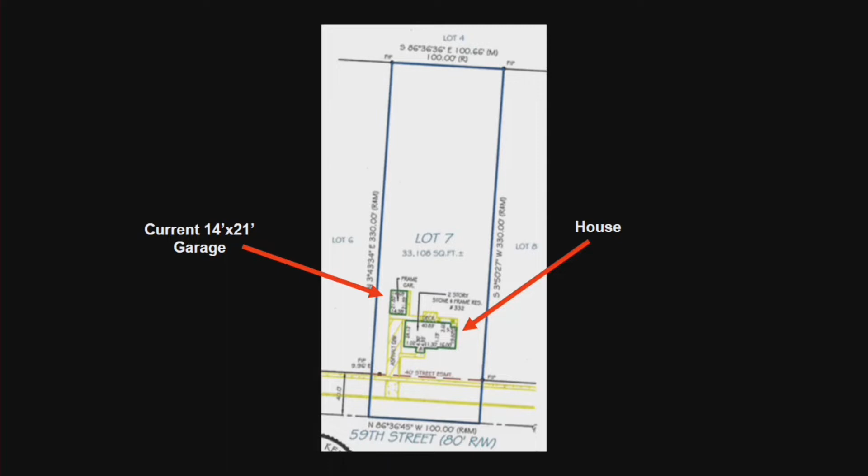Some of the reasons why we think it's important to have this size garage is because we really need the space for the vehicles we have, machines, snow blower, riding lawnmower, and the tools we need to maintain the property. Just because it's such a large yard, we actually do need a lot of different tools and things to be able to maintain it. So that's a big reason why we feel like we need this space.

We've thought about what else we could do if we didn't have this size of garage, and we think we'd be in a difficult situation. We would either need to keep some tools or machines outside of the garage, or we would need to come back and build a separate shed, which, if we had the option, we would rather not do—we'd rather keep everything in one place, in one building.

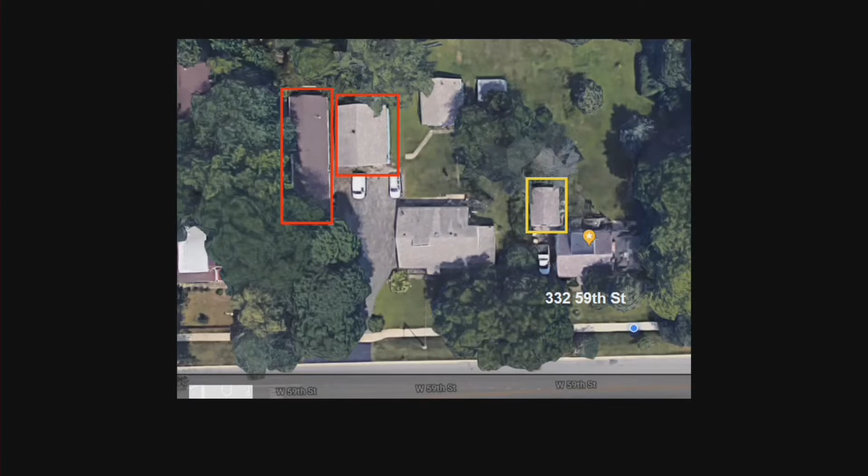A few other points we think are important: we've done the research and made sure this garage would not impact any other structures, any trees, or any of our neighbors. So we know there would be no negatives in that regard.

Also, the neighbors next to us, who would be closest to this garage and most likely most impacted, have verbally approved of what we would like to do. We've talked to them about it and they are perfectly fine with it. I think they'd actually be very happy to not see the current garage anymore, and I think they're looking forward to having it removed.

And the other point is that the existing garage, if we were to replace it with the same size it is now, it would not add any real value to the property by keeping what it is now.

And a last note is that we have no intention of putting this garage in and then up and leaving. We bought this house in Westmont just because we love the area, we grew up here, and we plan to start a family here. We really want this garage to be what we want it to be, our dream garage, so we can stay there long term and not have to move. Yeah, I guess that's all we have, basically.

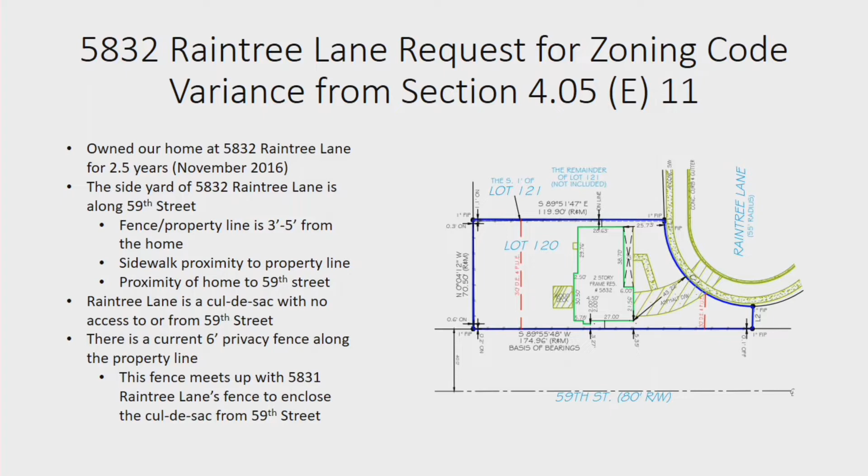It's also important to note that our house is at the end of a cul-de-sac. Our fence being there actually visually encloses our cul-de-sac. It keeps the foot traffic and car traffic visually contained. Our fence is a visual barrier from that. It's also important to note that we currently have a 6-foot fence, and our neighbors also have a 6-foot fence there, which you'll see in further slides.

We feel that putting up a 3-foot or 4-foot fence along the side of our property opens up our property to foot traffic and car traffic. It makes our neighborhood less desirable. It's a cul-de-sac, and it gives that safety and security, whereas with a 3-foot fence or a 4-foot wrought iron fence, you don't get that same feeling. I refer to that as a 4-foot open design fence.

We don't plan on selling our home. This is our home, we have 2 small children, which is also a concern for us with a small fence. But we do feel that in the future, if we ever decide to sell, it could potentially decrease our property value and the desire to purchase our home, as well as our neighbors' homes.

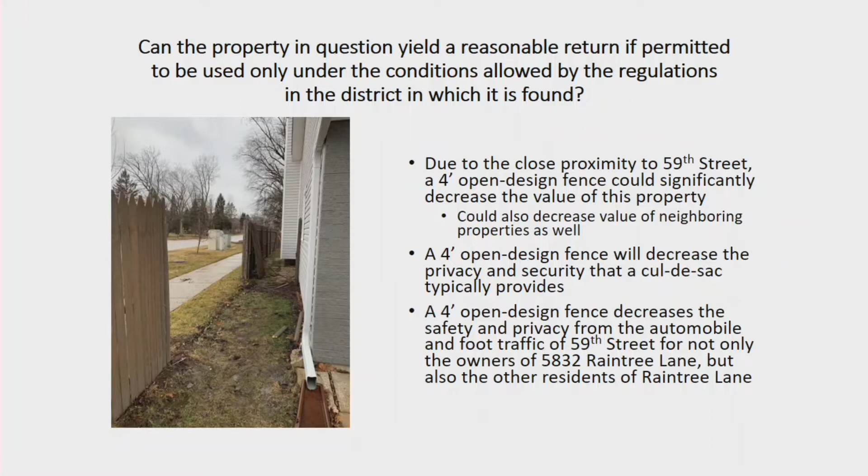I do feel our situation is very unique in that we are a cul-de-sac. There is no car traffic to and from 59th Street. Our street is enclosed that way, so our 6-foot fence would not obstruct any vision lines or sight lines of drivers. As you can see, that's our fence, the brown one to the right, and the lighter brown to the left is our neighbors.

We feel that our 6-foot fence, which is currently grandfathered in, is in desperate need of replacement. It's beyond repair. You will see in the next couple of slides what I'm talking about.

Here are some examples of the damage. That first picture is the back of our property. Our neighbor's branch had fallen, which impacted the stability of the back of the fence, which is why you can see the 2x4 supporting the back of our fence. The third picture shows the condition of the wood - it's rotting. You can see that post is the next one to go, essentially.

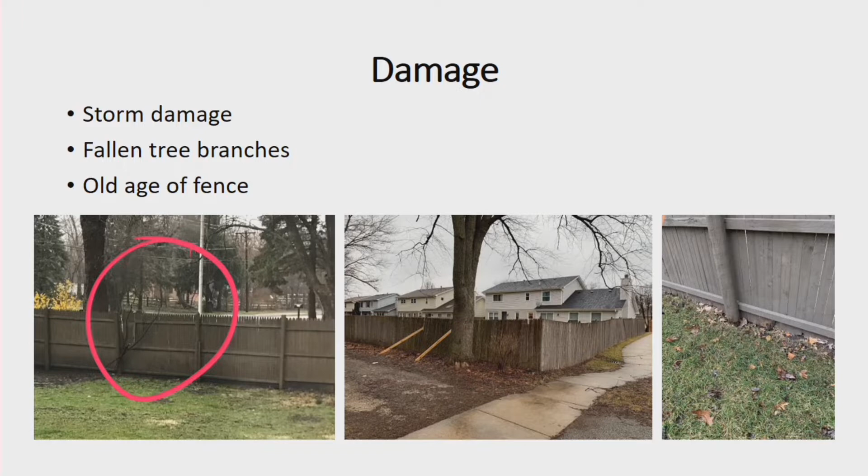We had a winter storm on November 26th, which resulted in a significant amount of ice impacting that section of the fence. We have it anchored so that it does not fall onto the sidewalk, which is about 2 feet from the fence.

This is that same storm, another section of our fence. Another branch from our neighbor's tree had fallen. Again, the March 14th windstorm - we were basically given no option as to what to do. It was beyond repair there.

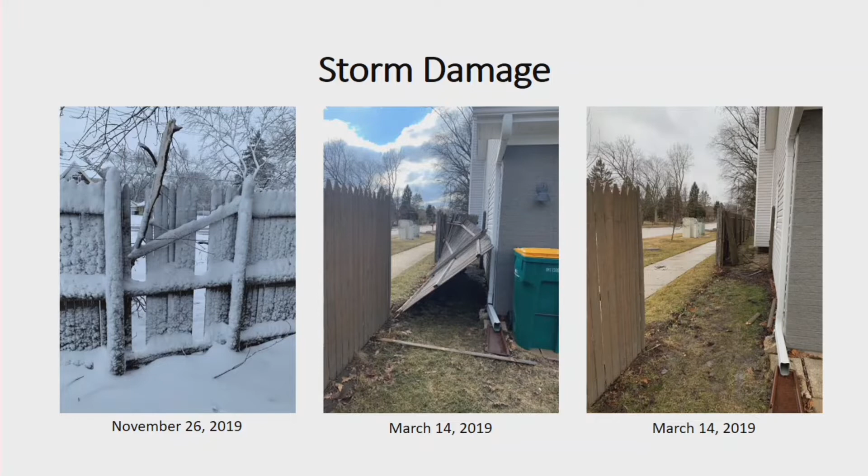These are some benefits we feel, not only for us, but for our neighbors as well. Aesthetically, a 6-foot fence meeting up with a 3 or 4 foot fence may look interesting. It would just allow more people to come into our cul-de-sac, unwanted individuals perhaps. There's the privacy of 2 adjoining 6-foot fences, as well as safety and security. We bought in a cul-de-sac in a subdivision for a reason - you have that sense of security that if someone's coming into the cul-de-sac that you don't want there, one or more of your neighbors is going to see them before they leave. We feel that having a lower fence will not provide that same feeling.

So we are proposing to install a 6-foot dog-eared shadow box fence. This is actually a photograph of our neighbor's fence along the north side of our property line. They have that current fence, and we would like to continue that design throughout. And that is all.

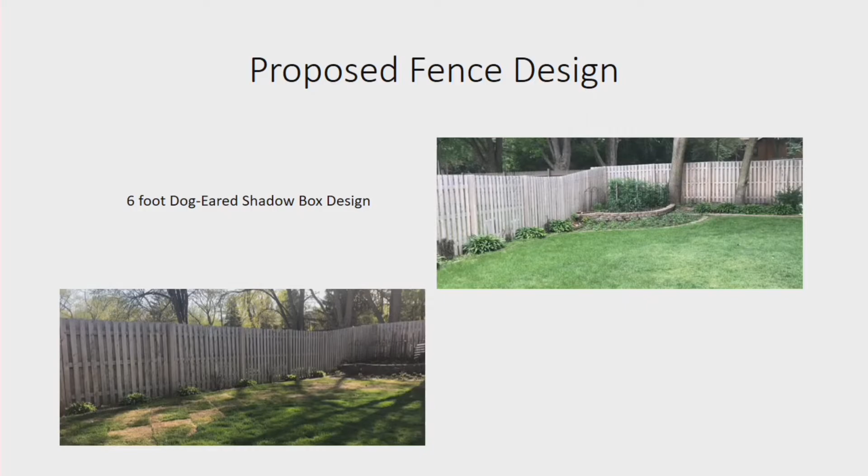Well, the variance request is for a replacement of an existing fence. If they were to tear down this fence, they would not be able to rebuild under the current zoning code regulations. They'd have to build a 3-foot-high wood fence or a 4-foot-high open metal fence. The other alternative would be a 6-foot-high fence behind the rear of their home, set back 15 feet, which would reduce the size of their yard and open up the southern edge of their property to traffic along 59th Street, increased noise, and confine the dog to a smaller area. So staff does concur with this application.

Also, there have been other applications in the past for variances for this type of fence, and they've been granted. We also concur that they would have to continue repairing their fence piecemeal, taking out a board or two or replacing sections, which is untenable and wouldn't add to the aesthetics of the area. So we concur with their application.

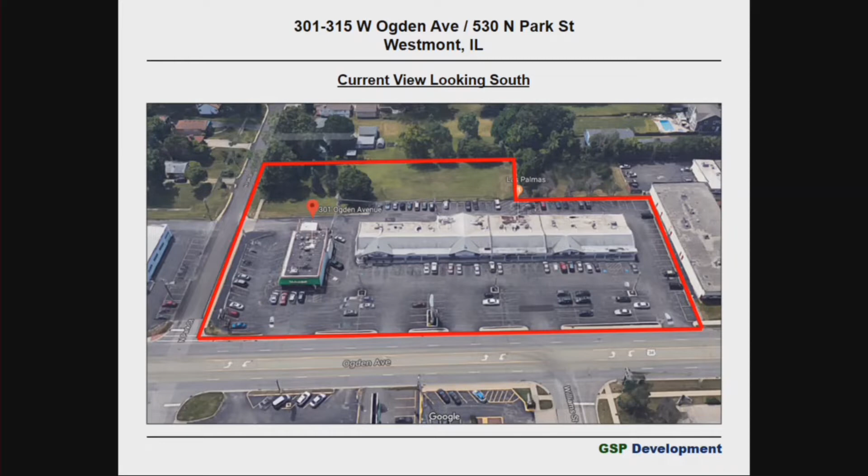As a quick overview, it's an older C-quality shopping center right now. Along Ogden Avenue, there's no landscaping whatsoever, no sidewalk, and there are 5 curb cuts currently. There's no trees, islands, or any landscaping on the entire site, so this would be a significant improvement from what is there now.

The next page shows the current zoning, and you can see my neighbor has been given zoning for what was a residential lot that's now become a commercial lot. We're asking for the same, and that's true as you go up and down Ogden Avenue. I put this in here to show that this is not something that hasn't been granted or given to others along Ogden Avenue.

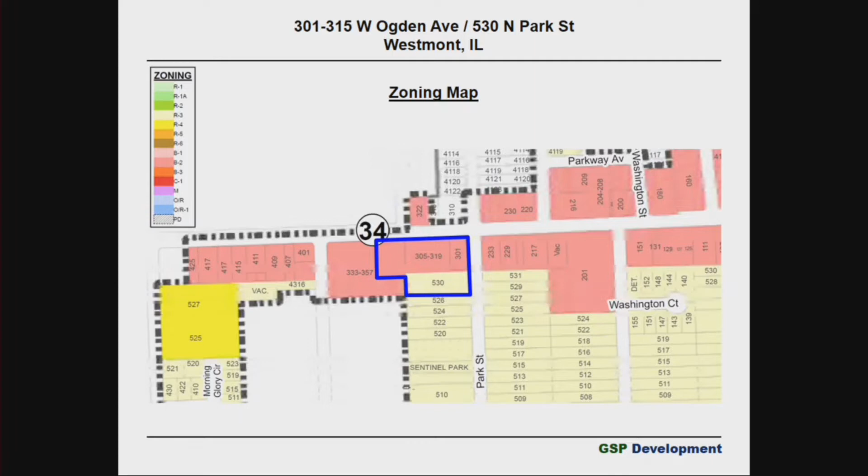The next one is a site plan. It's not a landscape plan, just a site plan showing our single entrance off of Ogden Avenue and an additional one on the east side of our property. All the landscape islands are shown also.

We are asking for some relief on some of the sizes of the parking stalls themselves. As a side note, these parking dimensions would be approved in virtually every other community in the western suburbs right now. Your code is much stricter - not that it's wrong, but it's much stricter than anyone else. This would be okay in Oak Brook or Downers Grove or anywhere else.

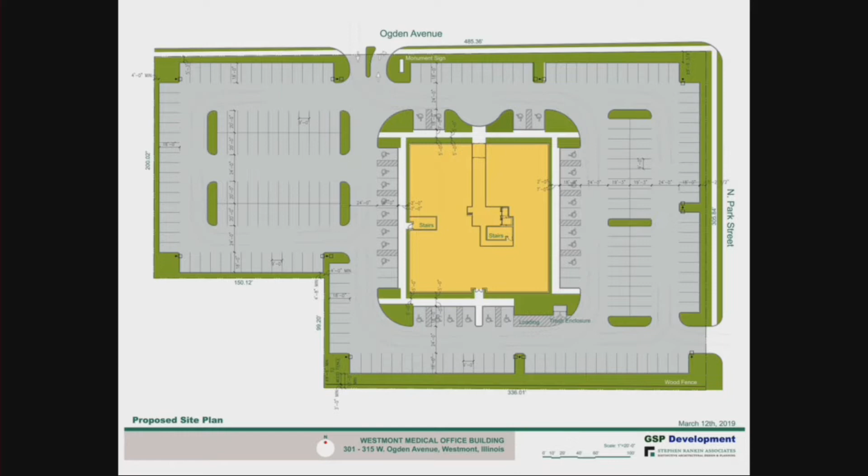So we are asking for some relief on the size of those. You had asked what changes we've made - we've made some changes on our landscape plan, pulling it off of Ogden Avenue a little bit. We'll have a strip of landscaping of grass, a 5-foot sidewalk, and then it'll vary, since it angles kind of funny right there, from 5 to 10 feet of additional landscaping along Ogden Avenue. So significantly more than was there before, a little bit more than we presented before.

In addition, we took some comments from the board members, especially the Chairman - we thank you for your input. We've added landscaping in the corners, and if you can see where the red circles are, we've cut out a couple parking spaces. We were slightly over what we think we needed, so we've cut out a couple parking spaces and put more landscaping on the site, which we think was a great idea and improves it.

We will continue to have, along our south border with our residential neighbor, about a 2-foot retaining wall and then a 6-foot fence set in. So there'll be a retaining wall, plants on my neighbor's side even though it'll be on our property, a fence, and then landscaping on our side. We're trying to give our neighbors a little bit - and we'll talk about photometrics, no light's going to spill over, but car lights and anything like that will be totally blocked since the cars will be along that south property line.

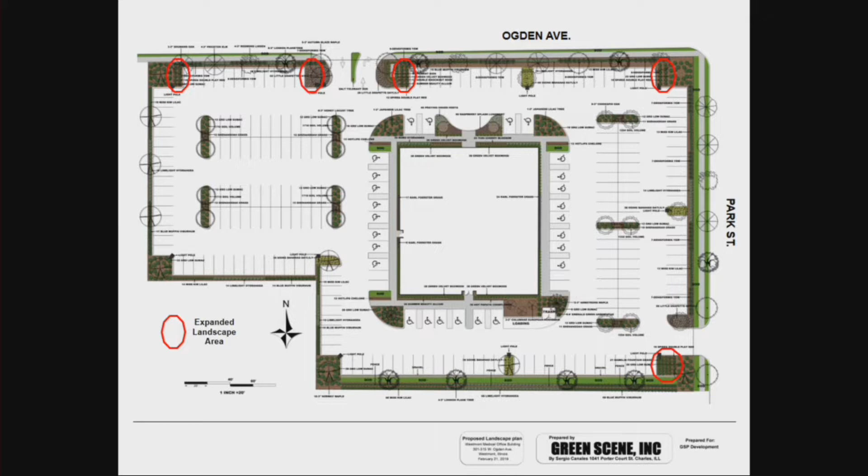The building itself is a 50,000 square foot, 3-story precast and steel structure. And with your permission, I'd like to show you some of the materials that we'll be using.

You think of precast sometimes as just a warehouse, but what we'll actually be doing is on the face of the precast - these are thin brick, but they will be impregnated into the precast.

I'm gonna have to have you talk from there. You guys okay? Can see it a little closer. Why don't you hand it to me? We'll just pass it right around. They want to handle that, but you can maybe just walk it around.

So that'll be stuck onto the face of the precast. And then what we're showing now is this will actually be the precast, and as you can see on the rendering, that will be exposed precast in that color, kind of along the bottom and along the very top of the building. And then in between these precast columns will be glass - we have two different types, and these are all low-E, fully insulated top-of-the-line glass.

I'll leave these here, I don't know if you can see them. On the elevation, it's maybe easier if I go over the rendering.

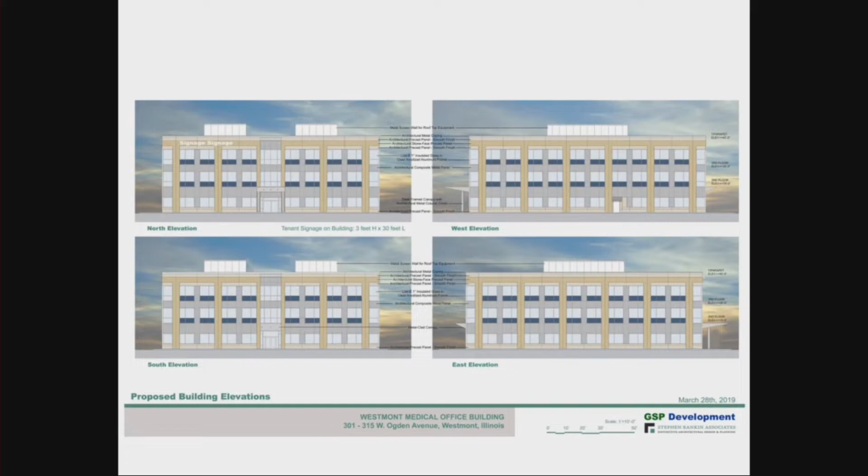So we have this precast here, which will have brick on it, and exposed precast along the top so there's a little differentiation. Vision glass, and then spandrel glass, which we've made darker so you can see the difference. Spandrel glass is basically glass you can't see through. We do this in medical buildings a lot because people don't really want you to see them. It's not like an office building where you want a lot of glass. But we thought adding more brick or precast would make the building too heavy, so we wanted to add more glass, and did it with the spandrel panel along with the vision glass shown there.

Some of those panes are split, sort of, right? Right, they're both split with this. Those two, gotcha, this would be in between it. And then as you can see here, we have another, this here is an aluminum metal panel.

So those are the main components of the building itself. On the roof, we will have two HVAC units, which will be sheltered and covered in acoustical panels that are required by code, but it'll be in that same color of aluminum.

We also have a canopy that comes out for the front so people will be able to drive up and drop people off. It will not extend beyond that though, because what we found is that to do that it has to accommodate a fire truck, so it has to be 14 feet high, and that doesn't really shelter anybody. So we lower it, but your car would not actually be underneath it.

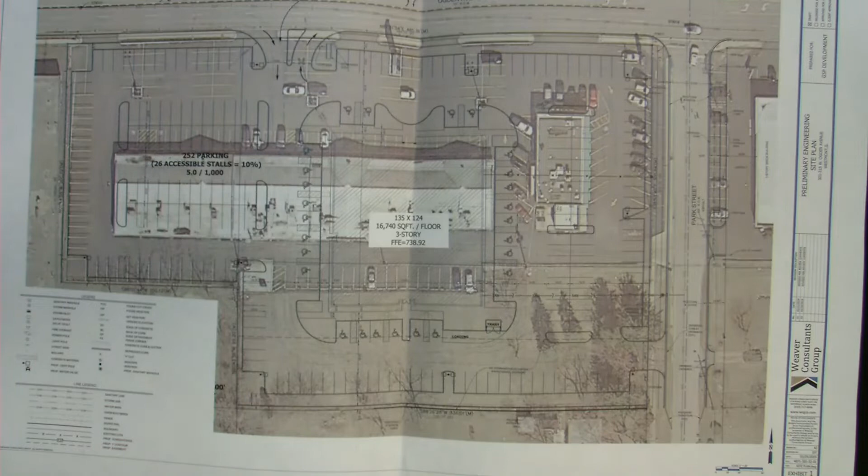What we propose to do, there was talk last meeting about the kind of release of the water into the storm system. I was wondering if you got any information on that, because I didn't see it anywhere. You had mentioned there was one that could fill up if it had a certain kind, and everybody else had, all the other water had priority.

There's two kinds of release, right? When it's our turn, we'll get into that in detail. I'm really concerned that it's only that big, and they're sloping the thing to my lot, and we already flood worse than we ever have, even without rain.

Like the property back here, the property over here, that's supposed to be a retention area, it was full of water on Saturday and it hadn't even been raining. Well, that may not be being maintained. I don't have any idea about that.

All I can tell you is that this, under current ordinance, will need to capture everything that's on that property, everything. None of it can go to you. And they can't get approved by the county or the village until they satisfy both of those requirements. I'm not sure that I'm smart enough to explain the math to you on how the volume of the thing works.

I wanted to see the picture, because I couldn't see it on there, but that's still a substantial amount of volume that that's going to hold. That's 8/10 of an acre, I believe, on that particular lot, and so that's probably going to be over a half-acre vault.

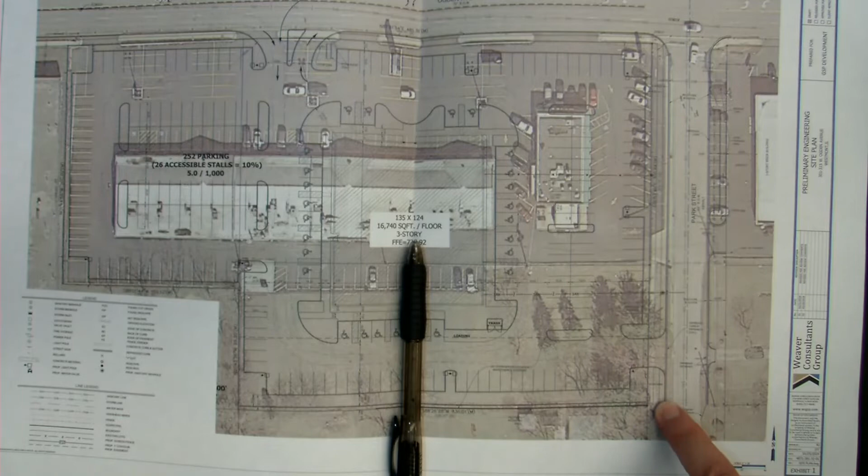My other question is, I see the driveway is really close to my house, and there's a curve which was discussed of having them only go left. I don't see that change on the plans.

Because of safety issues with the park down the street, I personally have a 1.5-year-old, and that's gonna be an incredible amount of traffic that's not being directed left. I know that it was discussed, but I don't remember that being agreed to at the time. I don't know if anyone else has better memory on that.

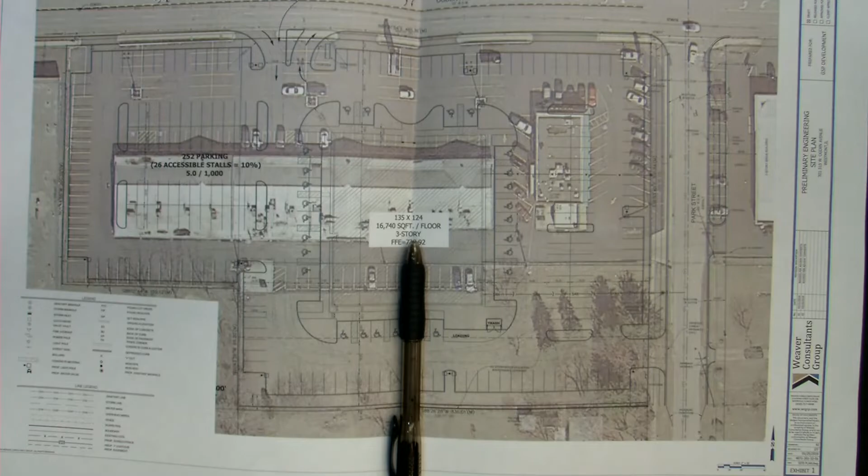And also, the curb and gutter, they're saying they're putting a curb and gutter, and where this driveway is, it floods right there, even during just a normal heavy rain, not an incident rain. And all that water with the curb stopping where it is is gonna be directed right into my front yard instead of where it would be dissipated the whole way down.

And the driveway appears to be over the sewer, the drain, the rainwater drain, the big huge drain where they directed from my driveway, they directed all the water to go down there. It appears to be over that, and I don't know — well, they can't do that, so the drawing may not be perfect on that, but I don't see that on there myself.

Well, it sort of got moved out. We are fully improving the street, widening it per the village code, the entire street. So yes, existing stormwater structures at the current edge of pavement will be relocated to the new curb and gutter of the widened street. We'll be adjusting the drainage to accommodate the street, and I believe that will pick up a lot of that water.

We're going to be catching, as was said earlier, there is no detention now. We're vastly improving the situation by catching all this stormwater and detaining it. Where there is no blockage between the current lot and her property, now our curb and gutter will prevent water from moving south onto her land. It'll all be caught by the curb and gutter and go into our system. If that wasn't enough, it will drain it down and out to the street rather than onto her property.

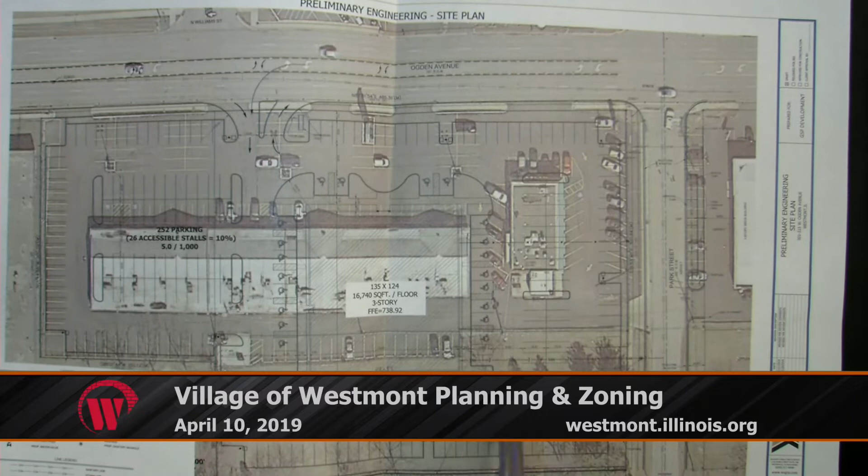It's actually a request. I know the fence will probably help, but this trash, where they have their trash, can it be put somewhere else, not by my house? Because you're more than halving the distance towards my property, and the garbage man comes at 5 AM.

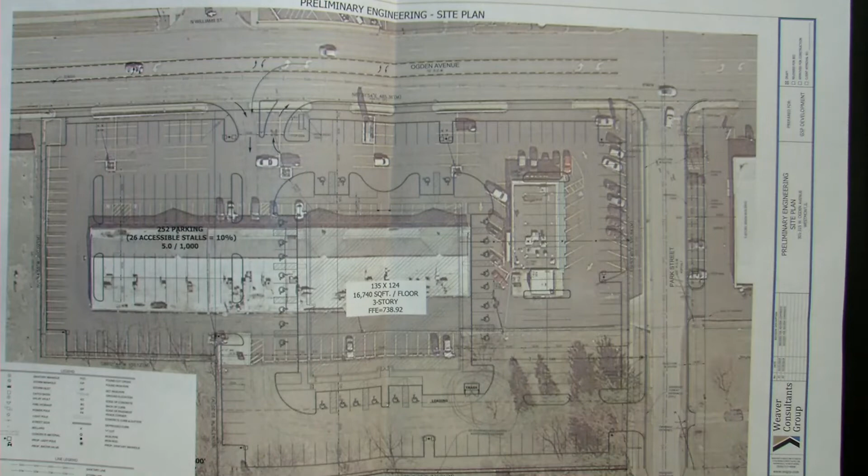We'd be happy to work with staff to find a different location. Again, this isn't like restaurant trash, it's not going to smell or anything. I'm worried about the noise, because they come really early, especially in the summer.

They usually do, so we can work with staff in finding a better location. Well, I think the problem also is that, no matter where it goes, you're gonna hear it on the property, probably, because I hear them from my house. We could move it maybe over here or something, because there's a whole row of them now. It'll be less than there's just one now. Yeah, there'll be a lot, so it's gonna be a lot quicker deal. I agree, but maybe farther away.

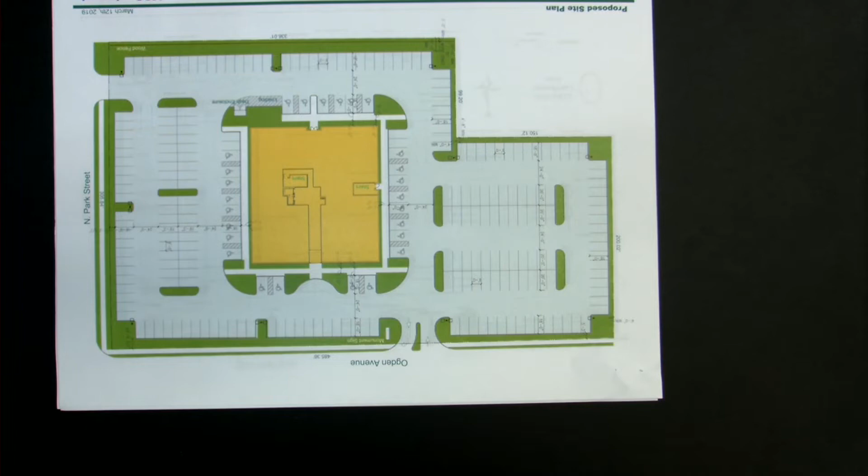I know, but if you moved it all the way over to the next drive aisle, there would not be any conflicts. All the way over where your finger is, yes - now we're on the other side of the street, you know what I mean? So we never can line up with the one to our north. We offset it and put the right-turn-out only, so we don't have someone turning left when someone else is trying to turn left on Ogden Avenue from across the street from us. Right now it comes out right about here, just to give you an idea. So if a car's coming this way out of this street and turning left, you will not have another car coming this way turning left into our parking space.

Could you bring that document over, and I will draw the motion I'm speaking of, because I don't think you understand my question. It's okay, that's what we're here for. My concern is - I'll put it on the screen, I'll get you back to the podium in a second - so you'll understand what I'm saying.

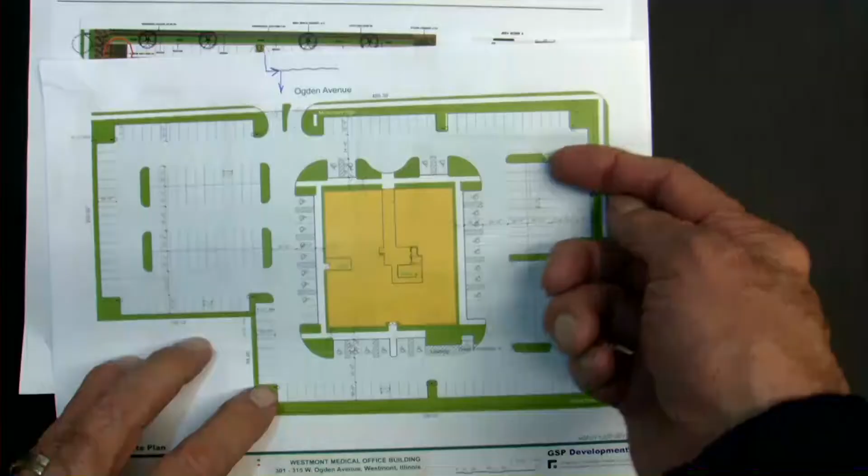So if we have someone going west on Ogden Avenue turning left into your site, and coming southbound from Williams going east, and then someone coming out of there - there isn't enough room left for those two cars to stack.

Which is kind of what you've got now, times five entrances. Yeah, but all you had to do was shift it a little to the west, and you wouldn't have that - it would avoid that. Unfortunately, that wouldn't work for us. That layout just won't work, we lose too many parking spaces.

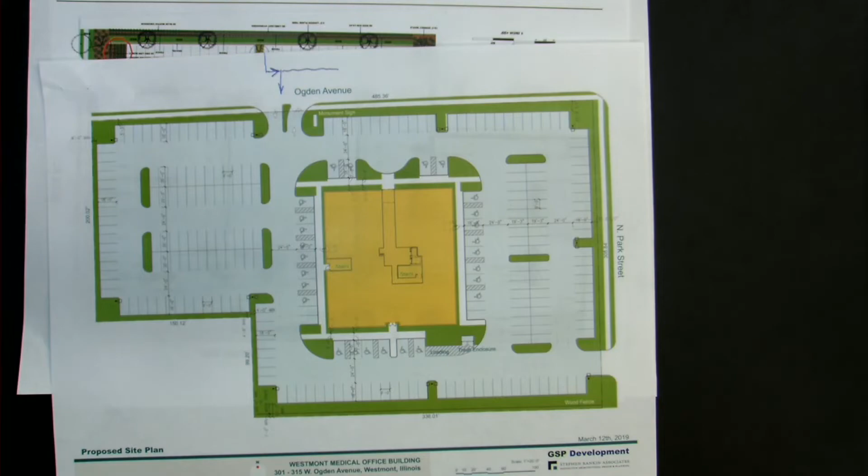Commissioner Lavoy: I don't understand how you shift it and it eliminates it, because it does - as soon as you have two or three cars lined up, you'd have to move it all the way down. I mean, you have that along - I'm up and down Ogden all day long - you have that along the whole way. That's why there's a turn lane, so cars navigate around each other.

They turn right into each other in this condition. I think if you got a guy sitting there waiting to make a left turn, the other guy goes around behind him - you see it coming out of every auto dealer and every other one. That's what I see, and I use several of the services in that particular strip mall. So I understand, Commissioner, what you're saying. It's not a perfect solution, but we do have a turn lane there to the left.

We're here to look at these things. Yeah, no, I understand what you're saying - great solution out of maybe a good solution to get a great solution. I see a better solution, just shifting it without losing parking. If you're trying to avoid an accident there, you could figure that out. I mean, we've had our experts lay it out, and we lost parking.

Okay, but I would agree that if we can relocate it and not lose any parking, we'd be happy to do it, absolutely happy to do it. We've tried it, and our experts aren't good enough to make it work.

But if you come up with it, I would agree to make that change to the plan. I'll make one final comment. If you moved that entrance to the right on the screen, to the other driveway, I know it's moving it away from the entrance of the building, but all the radiuses work. And externally, you wouldn't have a conflict at all because there's no entrance across the street.

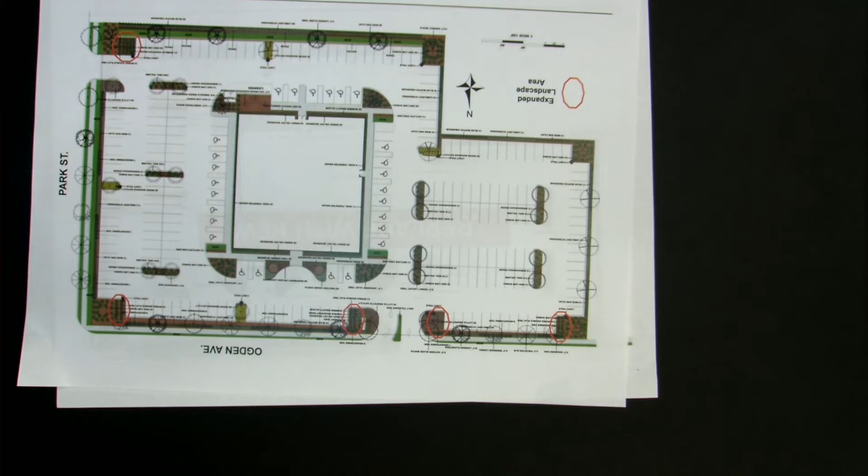I think what you're saying is just take this and slide it over. Your drive out would be right here. No, slide it all the way over to the next driveway. Well, now you're on the other side of the street, though. But that motion is eliminated.

We lose a lot landscaping. I'm not opposed to that if that's a requirement of the village. I just see that as something that avoids that turn-in conflict. During rush hour, people rushing across the street trying to get out into the dead man's lane, and somebody turning in could be coming at the same time, and it creates a conflict. It happens all up and down Ogden Avenue, and I just thought you could make it better.

Right, I appreciate your comment. I'm not opposed to it, but if that's what the board's recommendation will be to get approval, I would happily do it. Okay.

It looks like there's some conflicts between the landscaping and the detention system. Some of the trees that are specified are deeply rooted and may conflict with the underground system. John's looked at that, so that we won't have big, heavy trees sitting on top of it. So we've looked into that.

We don't have final engineering yet, so those are the ones I'm just looking at what I've been given. I'm just saying the landscaping appears to be set, we're not going to change that. But if we have to relocate our detention a little bit one way or the other so that we don't have heavy trees, well, yes, that's a good point, but we've thought of that already.

Okay, and what specifically have you changed on the building? Can we just go to the building? Absolutely. I know you brought in materials, they all look great. We were looking at the roof line last time, and we were looking at maybe breaking it up a little bit, and I can tell by that drawing there's a little shadow on the corners.

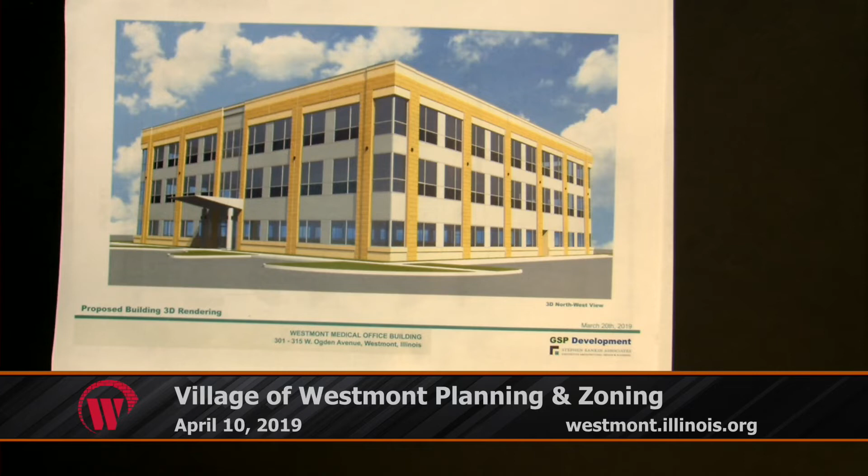Yeah, what we've done is we've actually inset it, our architect can answer any questions, but we have made some changes so that we do have shadow lines, which I think were brought up. So we brought this in, we've thickened these columns a little bit, so we do have some depth, it's not just flat. We looked at altering some of the roof.

It's not long enough. It looked really kind of funny in our opinion when you start having roofs going up and down. Plus, right now we're at the code limit, and so we didn't want to ask for a variance to start raising and lowering on a relatively short building. We see that on much longer buildings.

Okay, but the materials, I hope you see that, these are all absolutely top of the line expensive materials. Yeah, very nice. Then I have a question, it shows up on the...

I think the preliminary engineering drawing, there's a line of existing utilities that runs right through the building, and a pretty high number of transformers on that. That's all gonna be vacated. Oh, yeah, all coming out. That's what I'm saying, that's all dedicated just to the existing building.

Are you going to put that utility underground or not? Everything's underground, it's gonna go underground. But would it become underground down to the property line? Yeah, there'd be a drop right at the pole that's on Park.

And are you going to go around on the Ogden Avenue side or on the residential side? I'm not sure where we're going to pull our power, to be honest with you, so I don't want to say yes or no. All of the utilities on our site, though, will be underground. And wherever ComEd says they want us to pull it from, I don't think there's any poles on Ogden Avenue, so it'll come from the east side of our property.

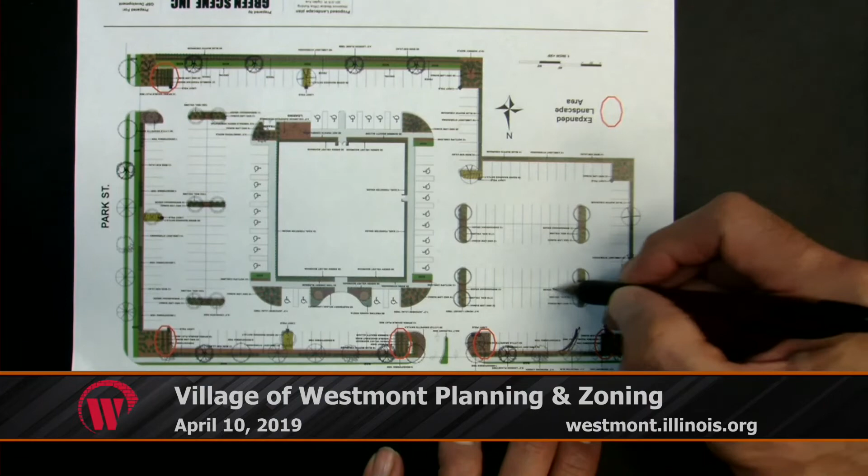These would have to move over, I think, 1 stall, because you've got a lot of traffic, to make all the turning radiuses work. The issue, and the challenge when we design on the fly, is you might be solving a problem brought up here but creating a problem none of us are thinking about, in terms of traffic backing up onto Ogden or conflicts with cars backing out of stalls. That's why I put this one in, to show that our neighbor to the west doesn't have an exit right there, which was concerning to me, but it's not, so it would allow a little bit better.

So I would commit that we will relocate it if it's the desire of the board, unless there's some major issue that staff or their traffic consultant comes up with. I agree with Bruce's comment that we can't solve it here. That's what we have professional staff for, that's what we rely on. Yeah, they need to look at it. We'll make it a motion for you to take a look at, and that's how I would favor it, and then the commissioners can choose to vote which way they want on that.

Any other comments? Commissioner Sharp: Does it make sense to change the wording? I'm concerned about the architecture, instead of saying consider elements, does it make sense to say add additional elements? Is that legitimate phrasing? You can be more assertive in your motion. It's not because I don't trust you guys, it's because there have been other projects come through here that have promised things that have not happened, and I drive past those projects every day, so I just wanted to be more assertive, that's all. And maybe in your motion you can reiterate some of the architectural features you mentioned earlier that they should incorporate or consider incorporating.